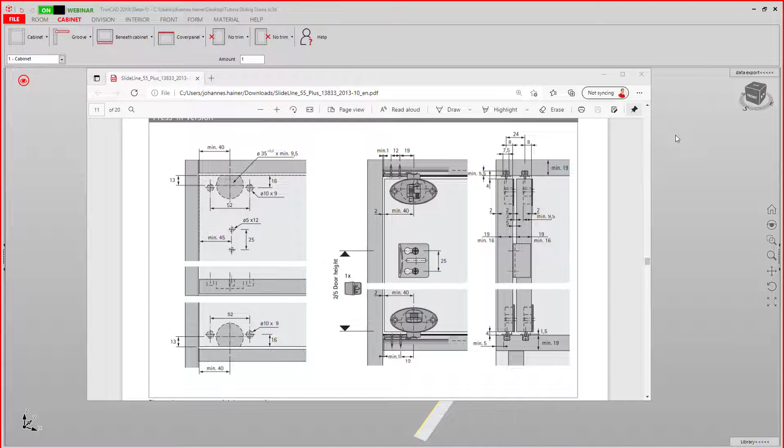Therefore, we go to Front, Sliding Door, and here to the Settings. Up in here, we enter our name. Here you can set your middle overlap. Overlap on the top and on the bottom. Here we have -4 on both of them.

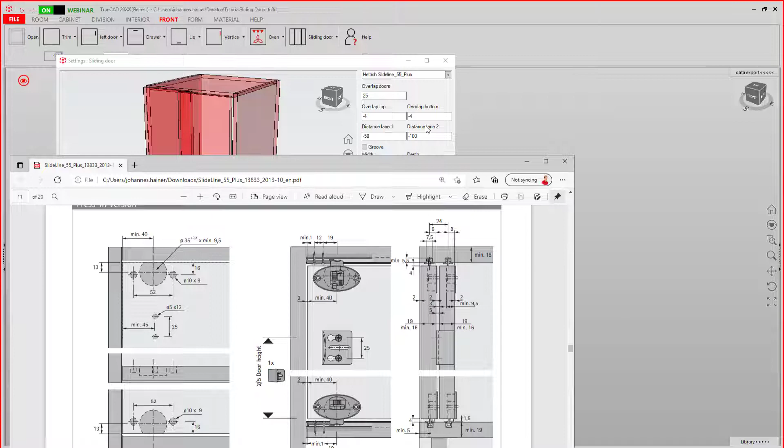Then we need the distances for the first and for the second lane. The first one has a distance of 5 mm, and we have a distance from one to the other lane of 24 mm. This means we have to enter 5 mm here and 29 mm here.

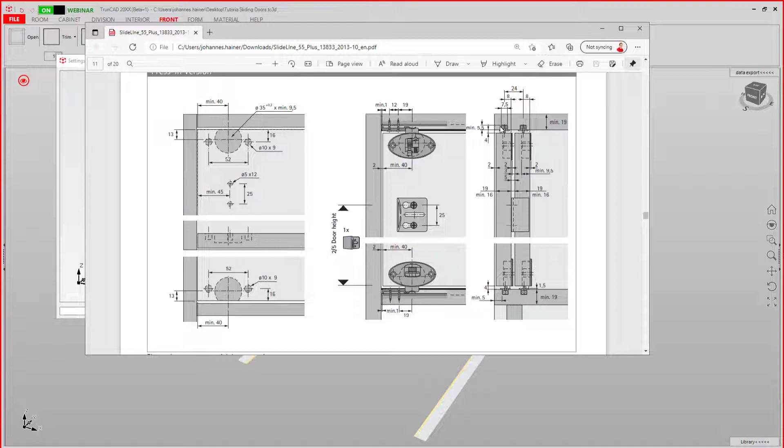Then we need to specify if we want grooves and where we want them. Now that we've activated our grooves, we need to set the measurements. Each groove has a width of 7.5 mm and a depth of minimal 5.5 mm. So we enter 7.5 and add a 0.2 mm clearance on the depth, which means 5.7 mm in depth, and then hit save.

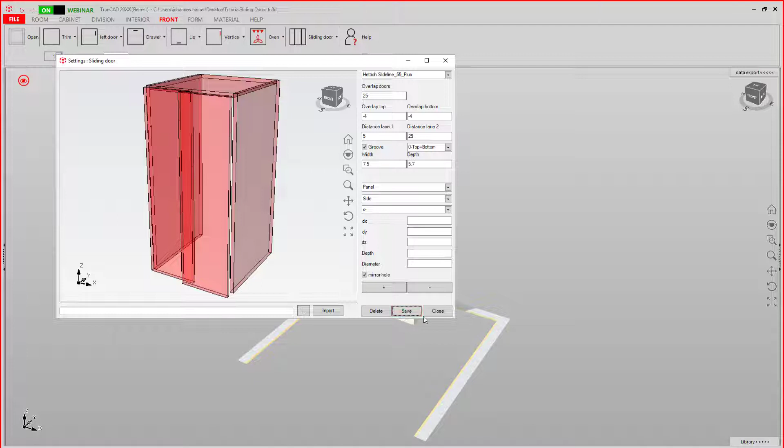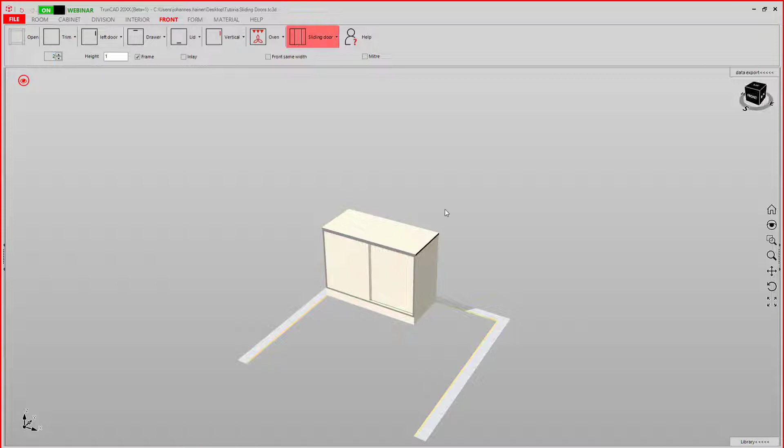If we now close it and add 2 sliding doors, we can now see that our grooves have been added.

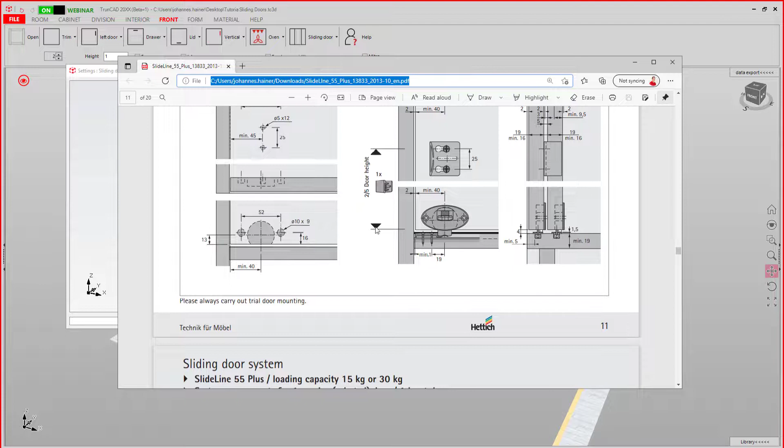Now let's get back to the boreholes. First we make sure to select the hardware we just created. Then we will take a look at the boreholes. For our first borehole, we need a distance in X direction of 40 mm, in Z direction of 13 mm.

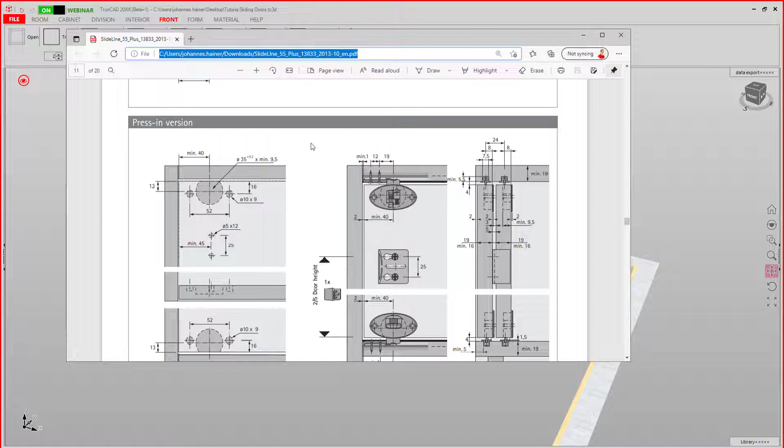Make sure you have panel selected, then we select a reference point here on the corner, then set our bore direction and enter our distances. In X we had 40 mm, in Z 13 mm. Then this borehole is 35 mm in diameter and 9.5 mm in depth. Enter this here, 9.5. 35 millimeters. Also make sure mirror hole is checked.

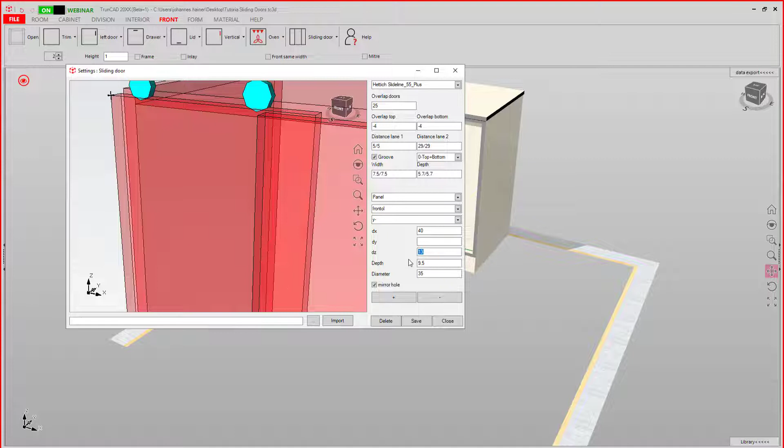Then we add this one, and then we see this needs to be minus 13 millimeters and not plus 13 millimeters. So we select this, enter minus 13 millimeters, add these holes and get rid of the other ones.

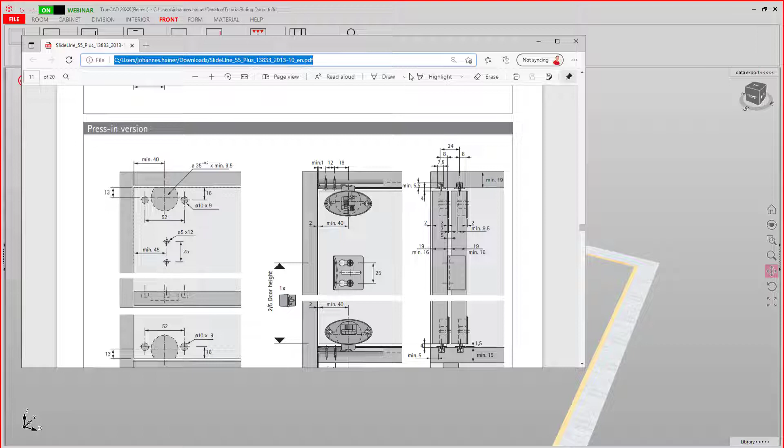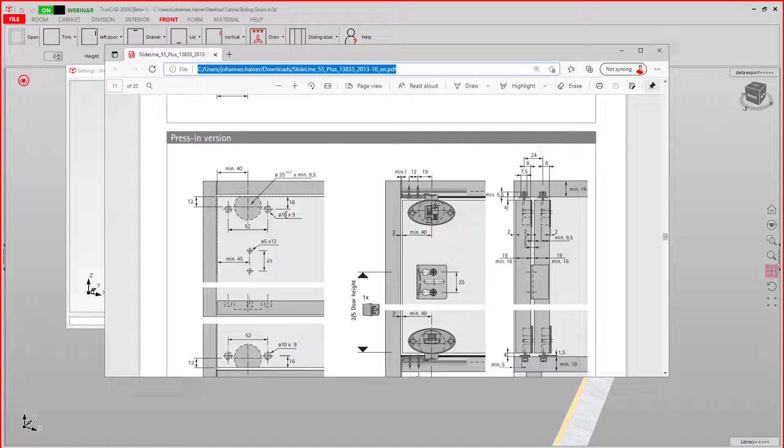Now the distance of these two holes is 52 millimeters and the position in Z is 16 millimeters. This means 40 millimeters minus 26 millimeters are 14 millimeters. So we enter our next hole at 14 millimeters in X direction, minus 16 millimeters in Z direction. Then we have a diameter of 10 millimeters and a depth of 9 millimeters. Then we click plus. Our next hole is in X on 66 millimeters, and we click plus.

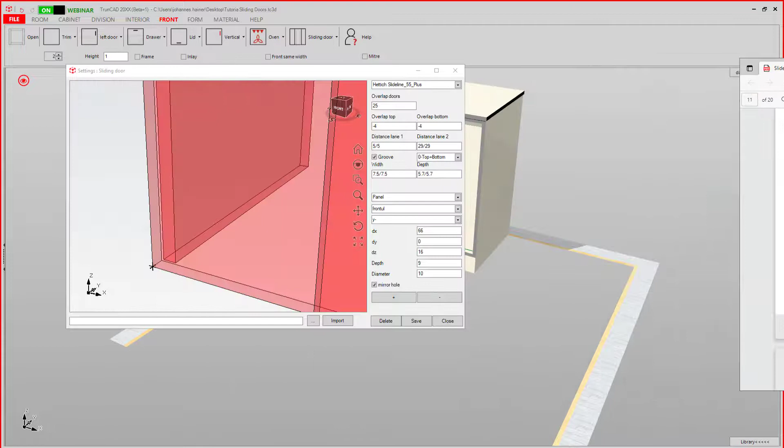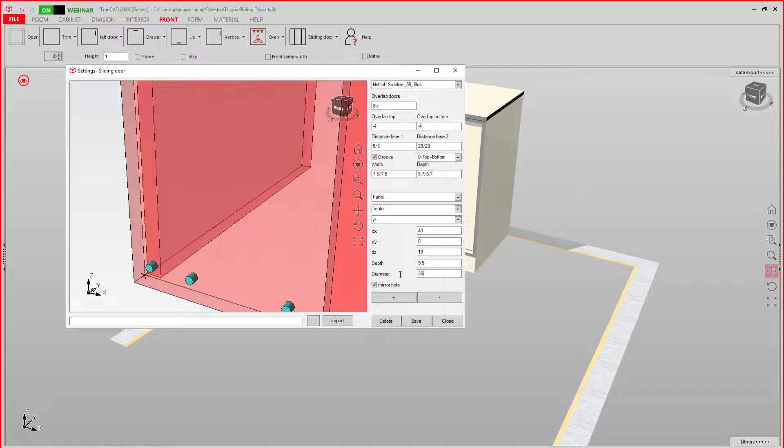And for the boreholes down here, we need to change our reference point. Now that we have a reference point here, we can change this to 16 millimeters, since we have the same distance on the bottom here. Then add this one and go to 14 millimeters here. Add this other hole, then change this to 40, 13 millimeters, 9.5 millimeters in depth, and 35 millimeters in diameter. And add this one. Then hit save and close.

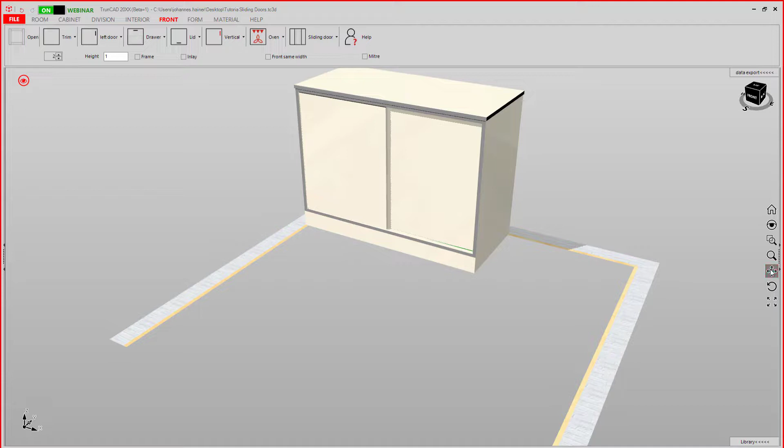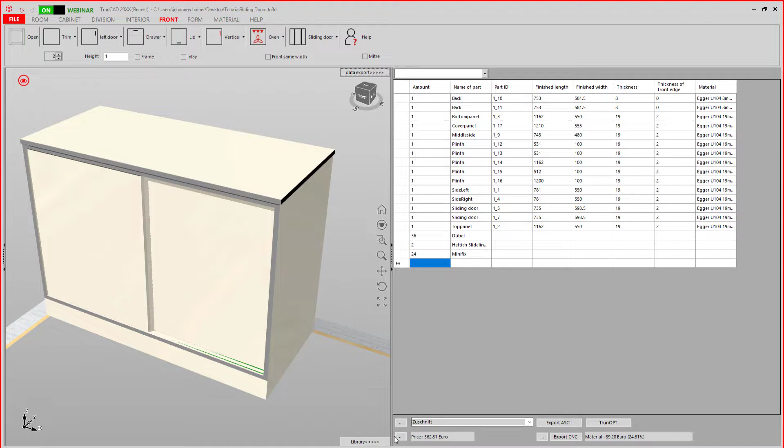If we now select the hardware again, we can now see that it has been added to our doors. As usual, you need to set your calculation settings for this in here, then hit save, and you can use it in TrunCAD.

This was how to create sliding door fittings for in-front mount for the use in TrunCAD.